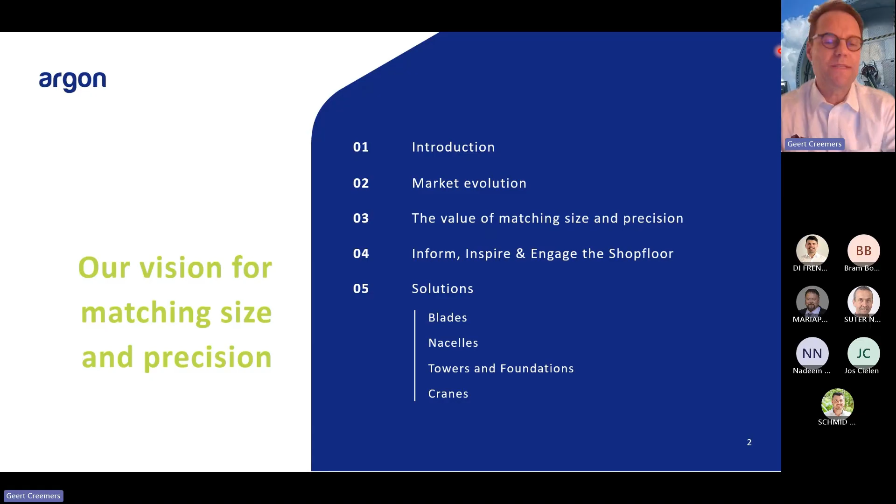Let me start by giving you a very brief overview of Argon in a nutshell. We are a niche metrology services and solutions provider. I founded the company in 2004, almost 20 years ago. I'm very proud to say that last year we created an Argon 2.0 - I created a new management team from people that came from within the company, we did a management buyout, and we are actually a new company.

We are quite small, 21 people, 4.2 million euro last year, which represented a 30% growth. Compared to what we did in the past, we are very, very focused now. Our focus is really on large scale metrology, and particularly also the wind sector is a prime focus of us. And in terms of partnerships, we are focusing on Hexagon as a prime partner.

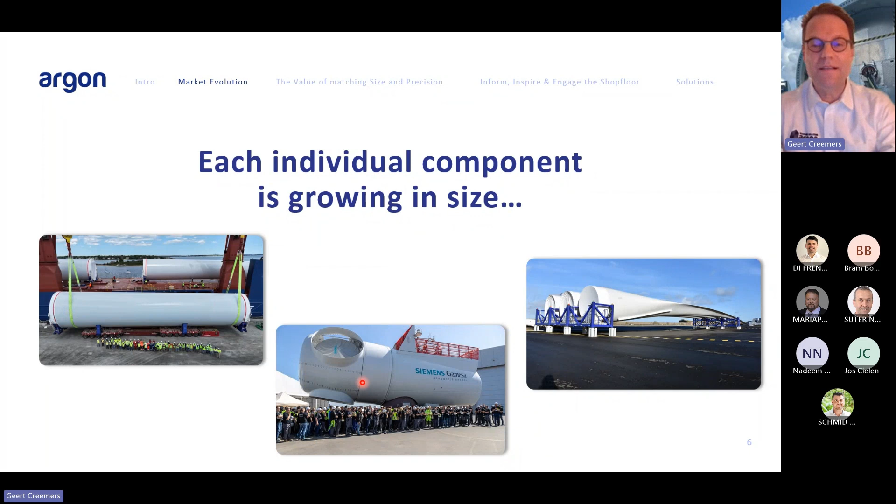Which means every individual component is growing in size, from the towers, the foundations, to the nacelle, to the blades. What does it mean in terms of numbers? You're talking about 110 meters, 120 meters currently, going up to 150 meters in the next decade, but beyond 150 meters. The nacelle, a generator, direct drive generator.

In the past, 5 years ago, you had diameters of 4 meters. Now you are at 8 meters. They go to 10 meters, and it will still go beyond that. The towers and monopiles, there you talk about structures of 100 meters and then 70 meters below the sea level. You're sitting with diameters of 8, 10 meters and going up to 12 meters. So these are gigantic structures.

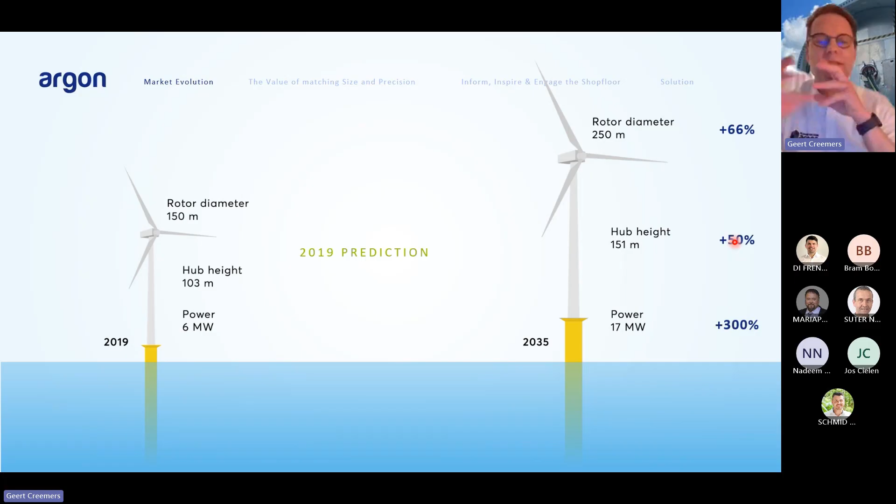And you think, well, how is this evolution going? So I took a graph here from 2019. The prediction was that by 2035 you would see a growth of power by 3 times, and the size in terms of hub height and rotor diameter by 50 to 66% increase. And if you look in reality, you see that after 5 years, almost 60 to 75% of this increase has already been observed.

You are sitting now at 14 megawatt turbines that are shipped out and installed into the sea from Siemens, whereas they predicted 17 megawatt by 2035. The rotor diameter, you are sitting already at 190, 200 meters. And the hub height, you are sitting at 140 meters. So it is actually growing even faster than predicted even a couple of 5 years ago.

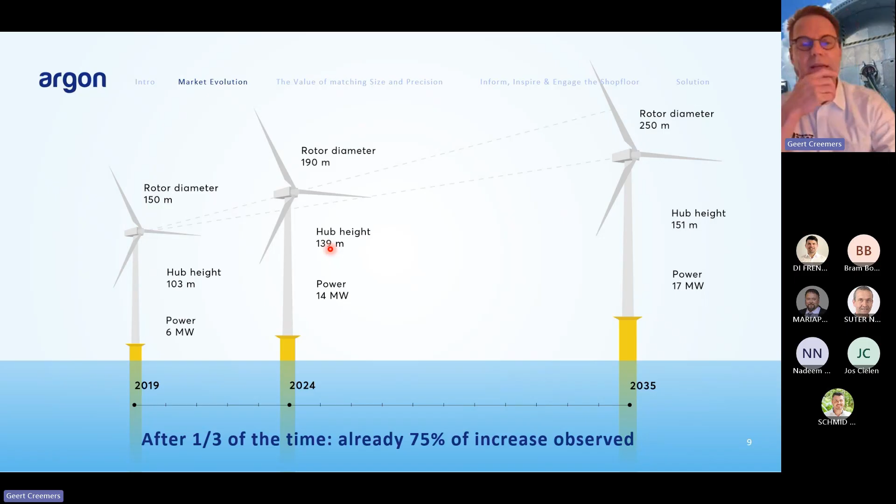So that presents enormous challenges. Despite the fact that you talk about 100 meters, even the millimeters do matter. It's a little bit like looking at a Swiss watch - there you have a 30 millimeter size, and it's the same as talking in terms of microns for a watch. A watch is made with micron precision. At a similar scale, here you have 100 meter structures that are made on millimeter precision.

And why is this important to millimeters? It's about turbine performance, lifespan, maintenance cost, and production efficiency. We'll talk more about that later. So when you don't get these millimeters right, you will have bigger problems, and these small problems can become even bigger problems in the future.

If you look at it, these wind turbines have the size of the Eiffel Tower. And it's really amazing to realize that geometry errors of 1 millimeter in certain key components can have a non-negligible impact. So it's pretty amazing.

So we see that when you start manufacturing with higher precision, bringing these tolerances down to millimeter and below millimeter, you get increased quality and increased efficiency. The quality is about your turbine performance - you increase your annual energy production, you increase your lifespan, less vibrations, less fatigue, and that means also lower maintenance costs.

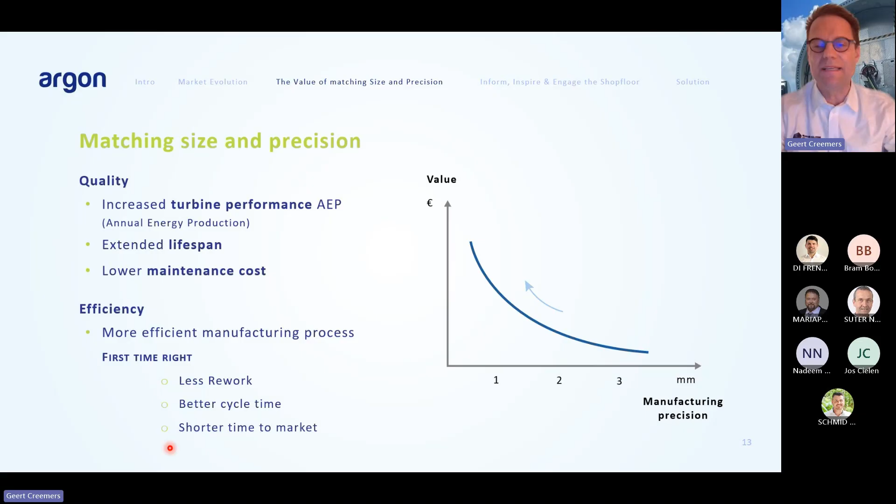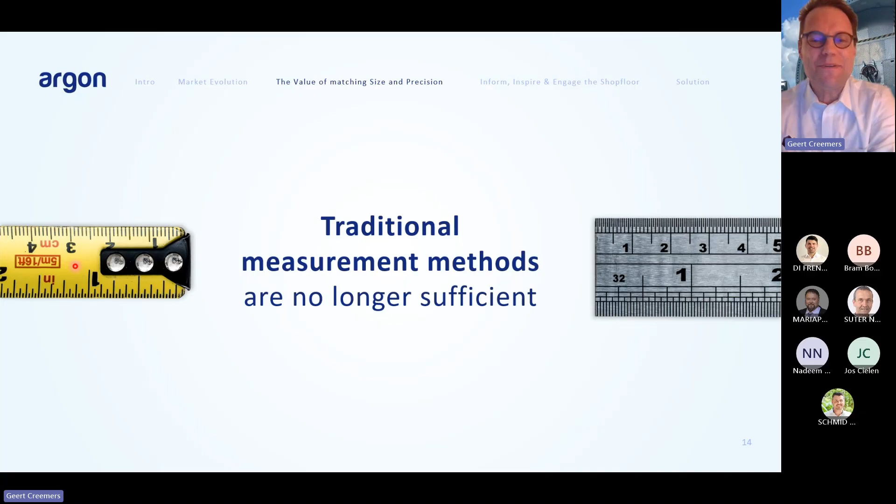It means also that these traditional methods - and what you see here is not a joke - are the methods currently most popular in use for this type of industry. At this moment, I'm in Aalborg in Denmark at the blade factory at Siemens, and I could not take pictures, but yesterday a blade was glued. I had a lot of tape glued on the blade to measure with the roller tape certain dimensions. So it's still going on. But these traditional methods to meet the challenges of the future will no longer be sufficient.

Why? Well, have a look here. This is how flanges of a tower or a monopile transition piece used to be measured a couple of years ago. You see lots of people, I count about 7 people, ladder, very unsafe. Of course, you can imagine it's very slow, a limited amount of data. If the blue guy measures it or the white guy, the data will be different. So it's user dependent, limited accuracy.

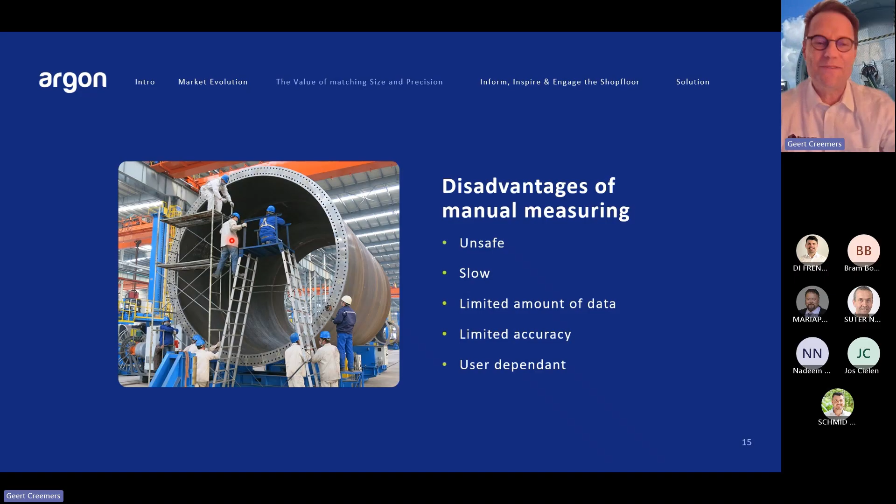So they're not going to make it with this type of method. So you need new technologies, you need new tools. So that is where Hexagon comes in to develop these new tools. And the first such tool was released in 2019, the ATS 600. It's a new non-contact large-scale measurement device. And I call it an automation.

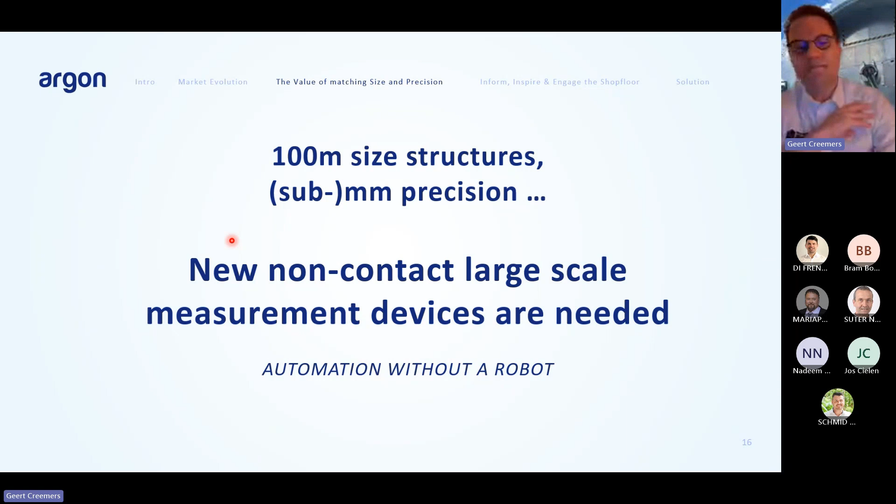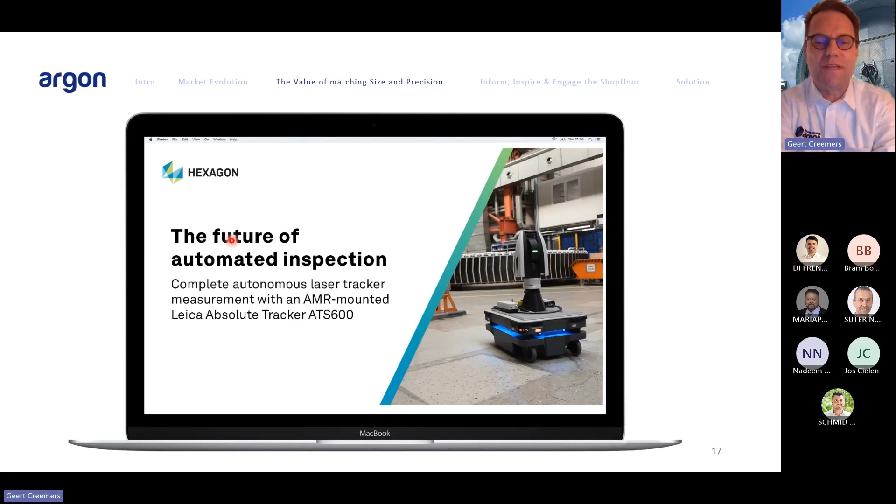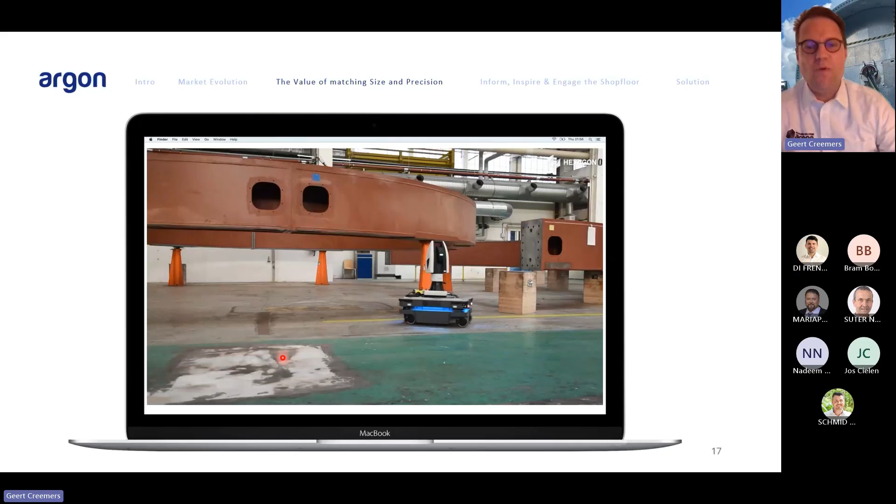We're talking about automation, automated measurements. And this is automation without a robot, because robots cannot be used when you talk about 100-meter structures. So, of course, to give you a flavor of this, for those who are not familiar with the ATS 600, here is an advanced implementation, even on a mobile platform, autonomous and AGV platform.

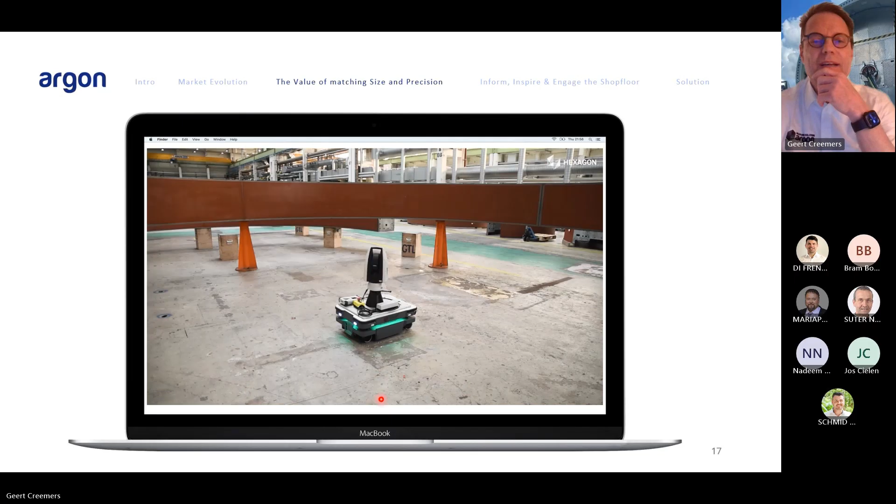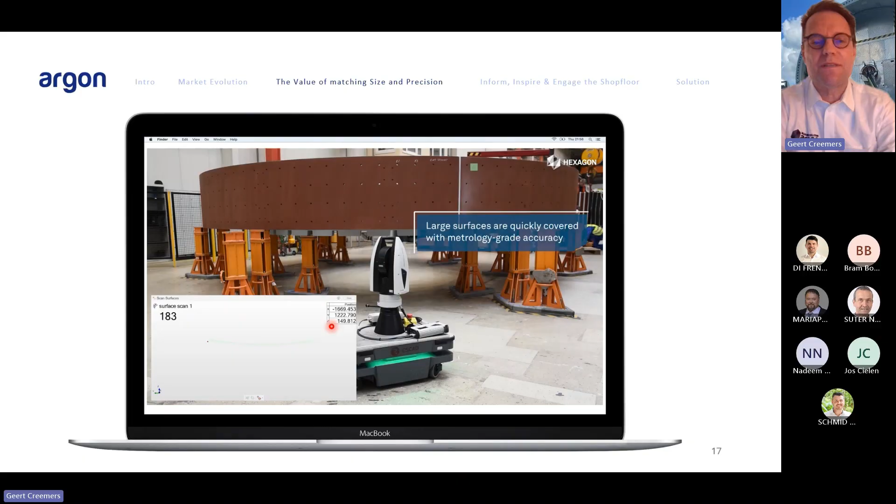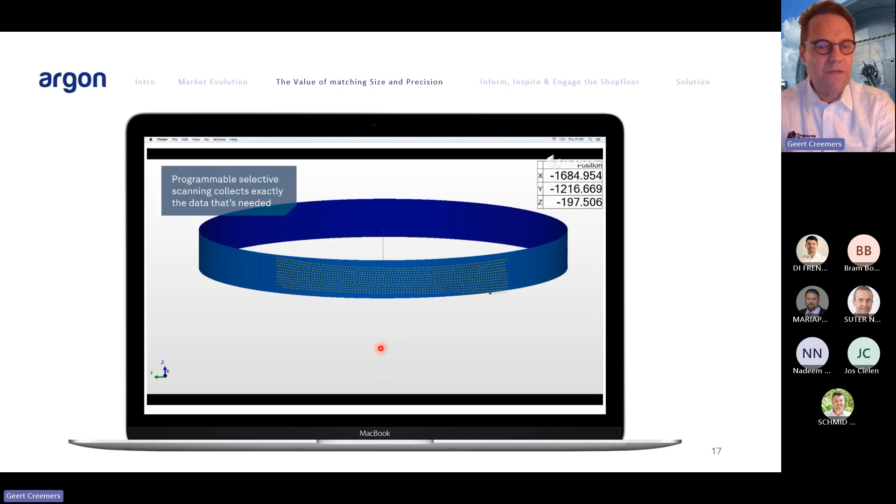And you see it really can measure with a laser dot autonomously without the involvement of a human hand, and it can digitize surfaces in quite a quick way. This example also shows that you can move it around in an automated way, and in that way ensure an automated accurate inspection of your parts on the shop floor. So you get your results. So you're fully digitizing your surface.

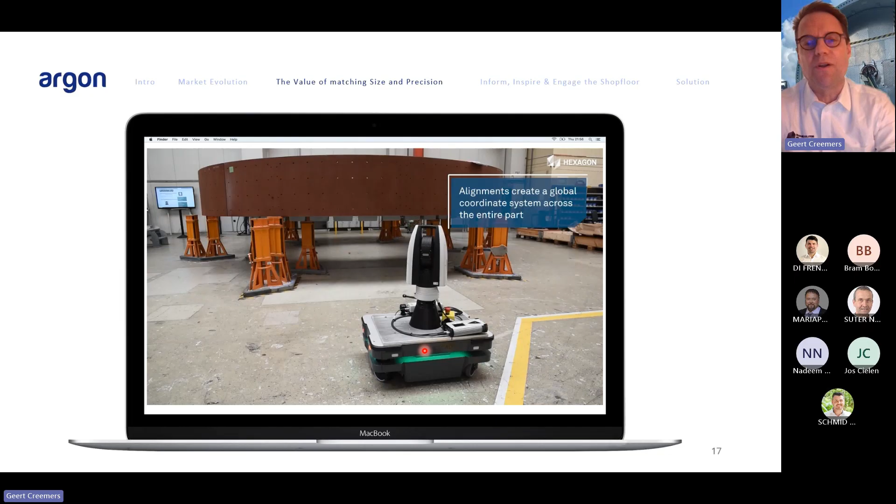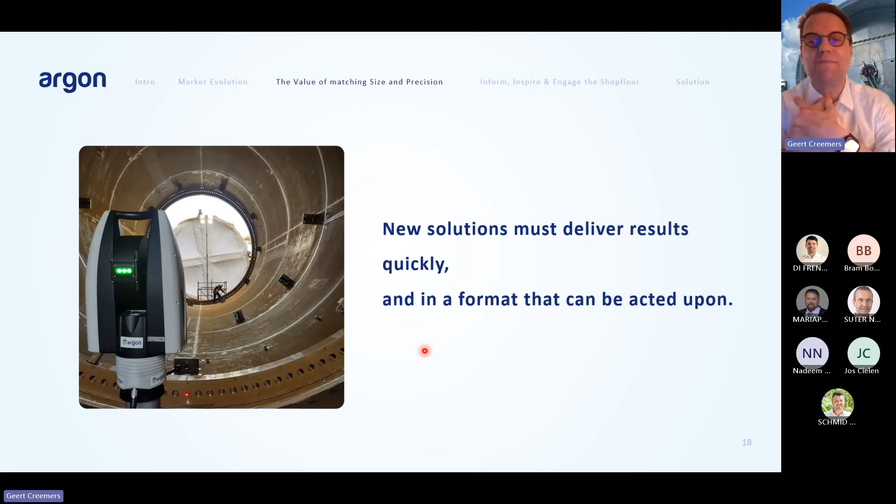So this gives you a flavor of these new technologies that are really autonomous laser tracker technologies. So these technologies, it's good that they can measure autonomously. It's good that they can measure accurately, but also it's important to deliver the results quickly, in time, and also in a format that can be acted upon. So that's also quite important. So that means that this feedback loop or feed forward loop, the shortening of that loop is key. If you can ideally do it within the cycle time of the production, you create the most value.

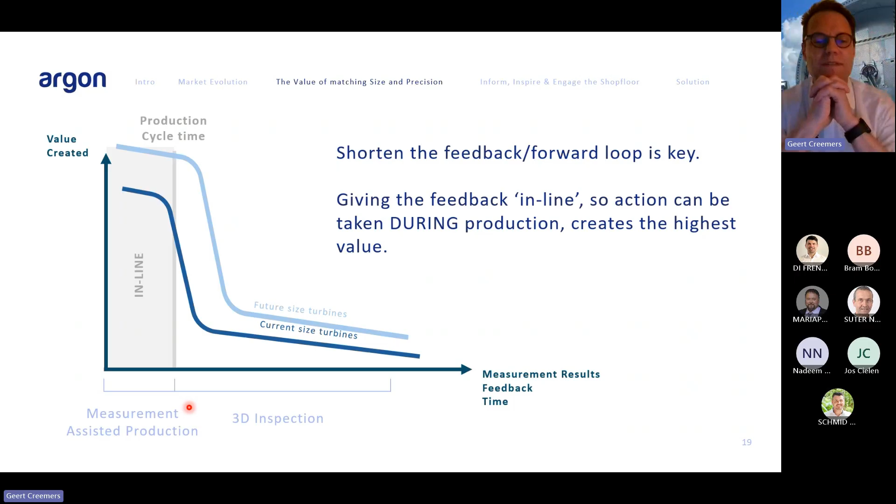We see for customers, when we go to a customer, we immediately look at, okay, is it what we call a 3D inspection solution? Or is it a measurement assisted production solution? Because we know the client has much larger budget, has much more interest when it can really become part and parcel of his production activities, so that the measurement results are really used immediately and are acted upon by a machine or an operator as part of the manufacturing process. So feedback time is critical.

And of course, you have to do this all without robots. So whatever you do, you have to get operators involved. You have to empower operators. It's a people's game. And to give you an idea how Siemens Gamesa, currently our biggest customer, also did communication about getting their operators involved, we show you this video. It is a video that was created as part of our work for them, and this is how they communicated internally.

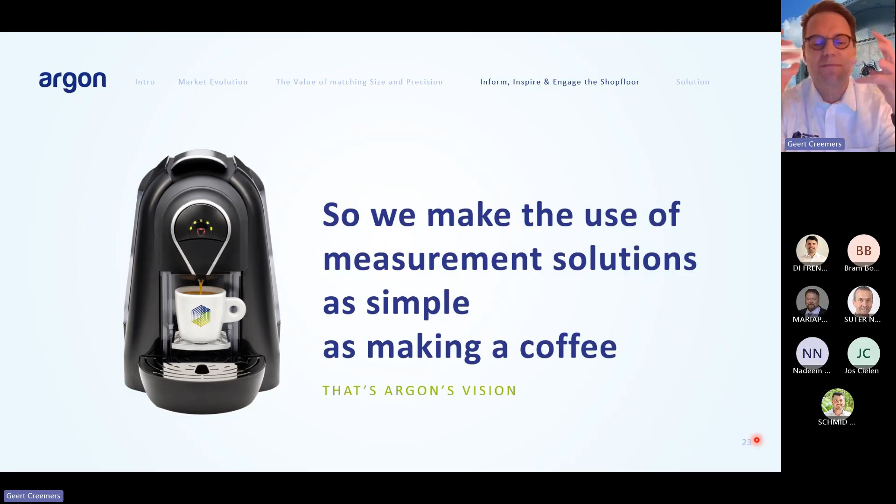And it's really based on the philosophy of bringing measurement technology on the shop floor, and making sure that you get these operators involved, that the actions that they take are correct. And we have used the term making the use of the systems as simple as making a coffee. Really, it is very rewarding when you do these things, that you get the involvement of all the people, of the operators, of the maintenance persons, and you feel also that they start owning the system.

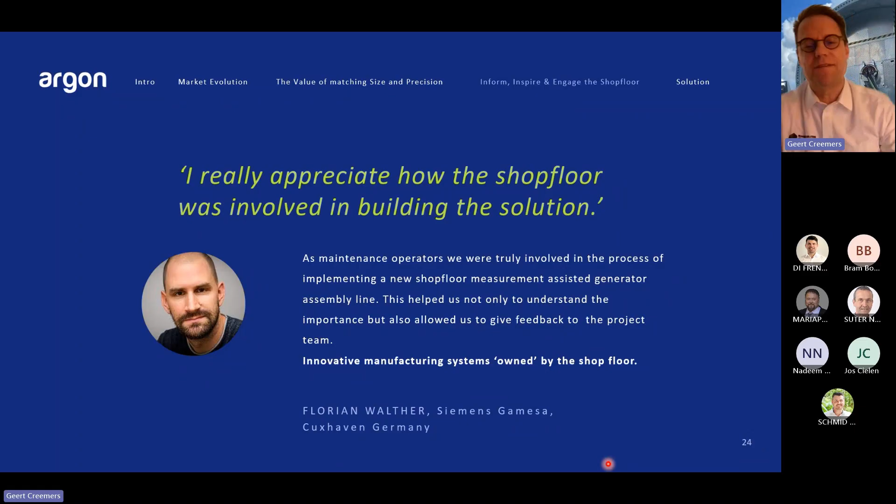And of course, it's all about, if you cannot see it, you cannot solve it, you cannot prevent it, you cannot improve it. A small anecdotal story that I can tell here is that last year we did a project in Denmark, where a supplier of windmill towers was handling the towers with the hook, as they have been doing for the last 20 years. But because the towers are getting bigger and larger, suddenly plastic deformations started to come in because of the size and the sheer weight, 400 tons.

And so they were measuring as they did before, measuring as much as they could, but with the traditional methods. So they didn't pick up these deformations. And it's only by bringing in more advanced technologies, when Argon was called in, we could actually make the invisible visible, and then try to solve it, prevent it for the future, and improve their processes so that they can avoid such things and deliver better quality.

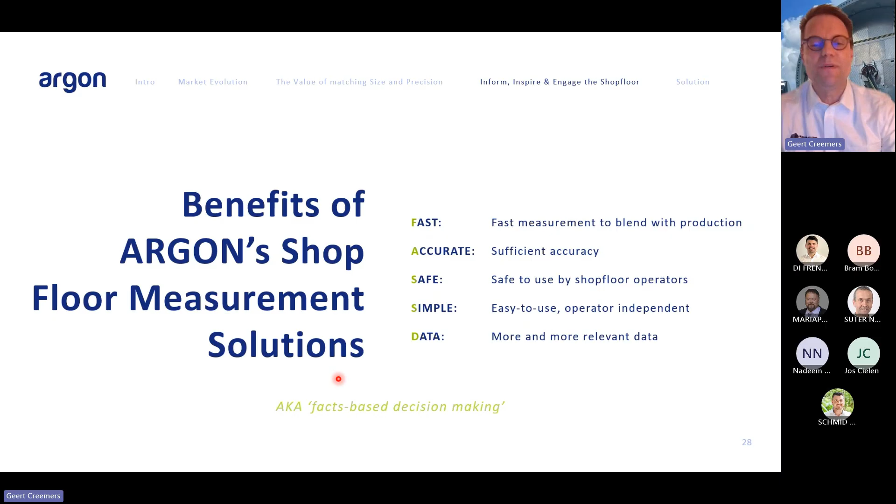So yeah, it's all about what we call shop floor measurement solutions. And the benefits of those solutions are speed. Generally we can go up to 4 or 5 times faster than traditional methods. We are generally more accurate, we are safer, it's much easier, and you get more and more relevant data so that you can come to really fact-based decision making.

So the building blocks really are, generally we have 5 building blocks of our solutions. It's about hardware, services, and software. The first 2 components are hardware, which is the measurement technology standard that we buy mostly from Hexagon. And then we have our own automation hardware and tooling. In this case, you see a trolley, you will see other examples.

When it comes to the software, we use also external software, Metrologic or SA, and we have our own smart interfaces, our own human-machine interface, which is very critical for a good, easy solution, and also the application scripts, which contain all the know-how of measuring and analyzing the data for a given niche application.

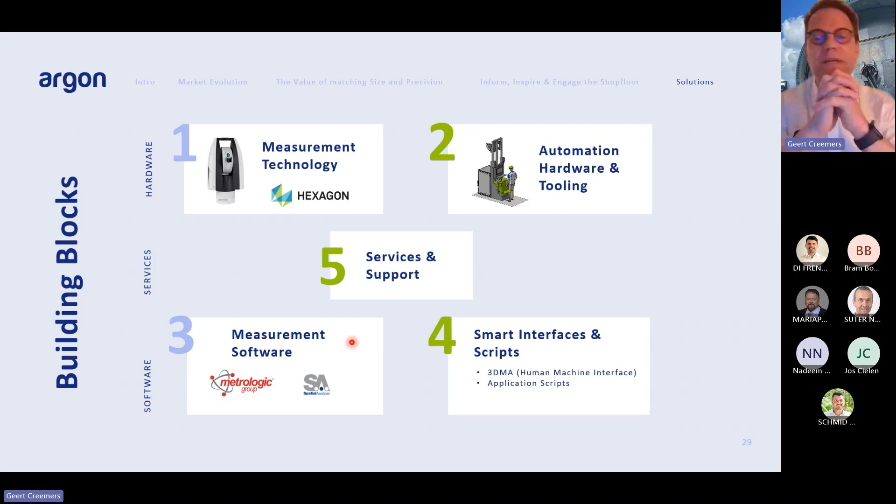And of course, with software and hardware, you're not creating a solution. You have to really offer a lot of services to implement it, to guide, to train, retrain, to optimize, and then also to support along the lifespan of the project. Support with new programming of new variants, support with yearly update training, support with small optimization services, backup services, calibration, and so on.

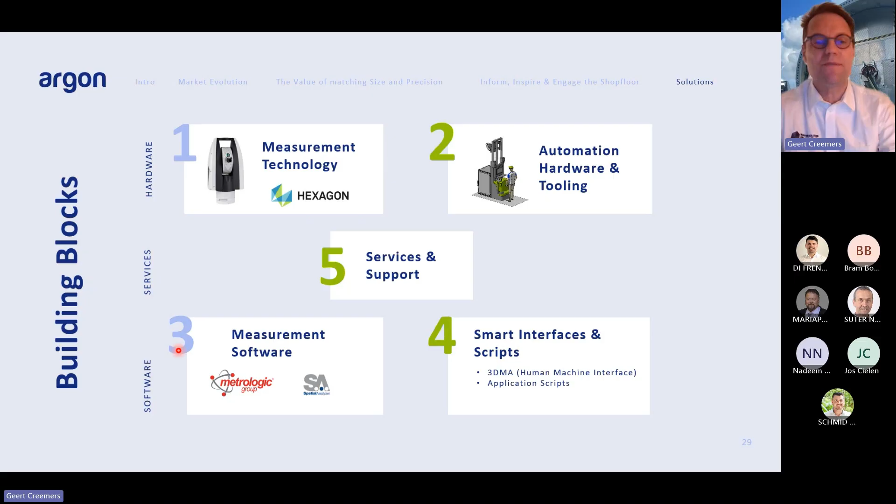And together this then delivers a solution that for the customer is really much more than the sum of its components. And if we look now concretely at what that means, let's go through some solutions that we developed for the sector step by step, starting from the blades over nacelle to towers and cranes.

Let's start with blades. So blades, some of the key challenges there, when it comes to product quality, it's really the wing geometry. When it comes to surface smoothness, the overall aerodynamic shape, that is really critical for turbine performance, critical for minimizing turbulences and vibrations.

The root, also very important to make sure it's fixated well on the hub. Recently, I saw some pictures in the news of a blade that really broke off. That is probably because it hasn't been made as precise as thought, and fatigue pops up quicker, and in that way you get failure. So the flatness is important.

A nice perpendicularity of the root on the blade axis is also important for avoiding imbalances. And there also precision: the more precise you produce, the less imbalances, the less vibration, and the higher performance you generate. Of course, also when you're producing these large components, when you're setting up the molds, when you're drilling the holes, assistance is also needed.

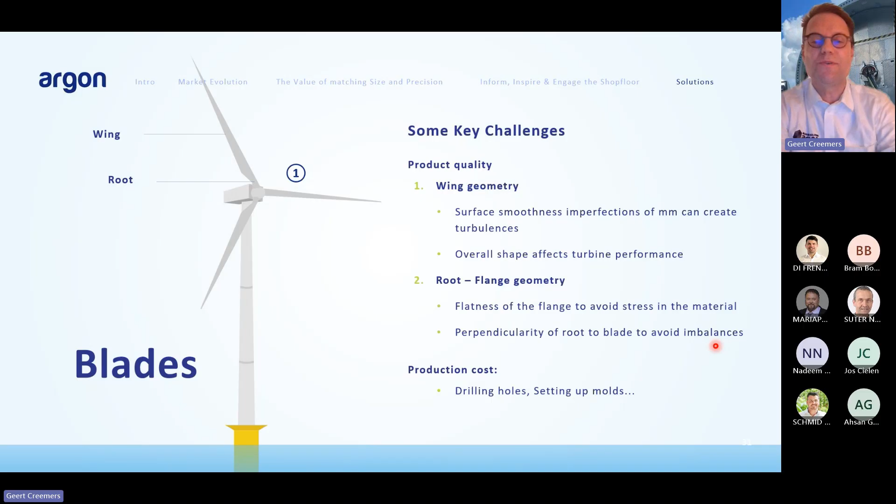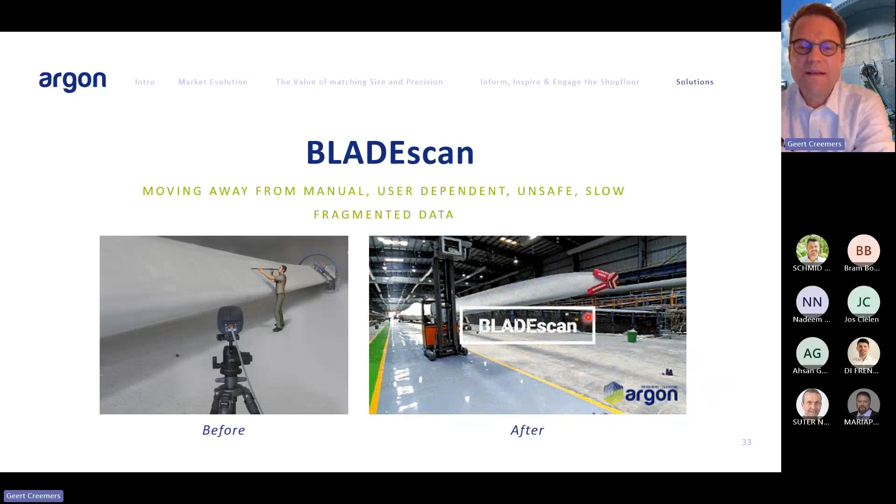But you see, it's a trolley that's moving around the blade, and the root is at this moment still inspected tactile, but we're also working on non-contact next versions. So it is really about a trolley that is moving around a 120 meter blade, going up to 8 meters height to measure the trailing edge, and it's all guided by a human machine interface on a tablet PC.

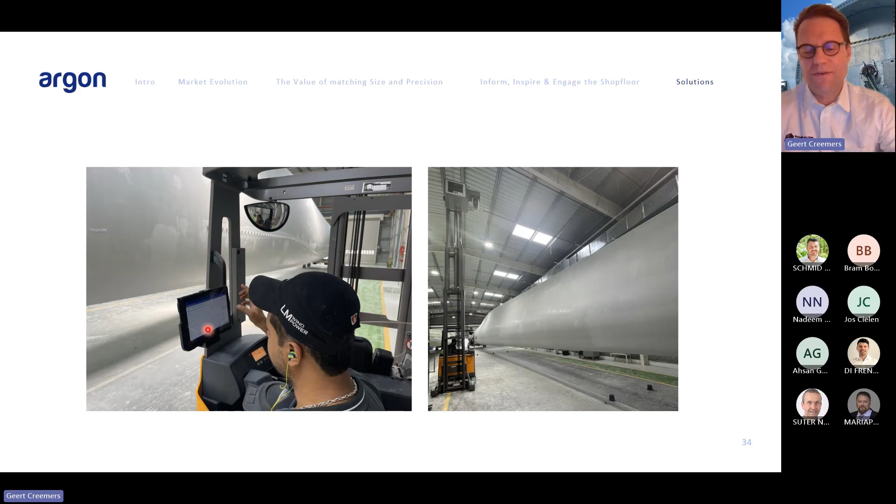A next critical component of a turbine is the nacelle, where the generator forms the core of that part. And when you talk about the generator, it's really the air gap that is a very important determinant of the annual energy production of such a turbine. A 1 millimeter deviation from the optimal air gap leads really to a reduction of this annual performance. So it's really a challenge to produce these in a repeatable way with the optimal air gap.

And that is something where we have helped Siemens significantly. And in doing so, we also created the first time right generator assembly process. So they gained in terms of production efficiency and in terms of product quality.

And we have done this by measuring the rotor house and then doing the assembly of the stator based on the data from the rotor house to do a measurement assisted assembly. And going from the past manual 1 hour measurement time solution to a live tracking solution for this segment assembly. The rotor housing is measured in about 15 minutes.

Also, again, you have more accuracy, you have less operator action, so it's safer, it's simple, and you get live results. The rotor housing geometry is used as input for the stator assembly. It is done with Hexagon technology and also partly with other technologies such as a laser radar because of the precision that this device can deliver.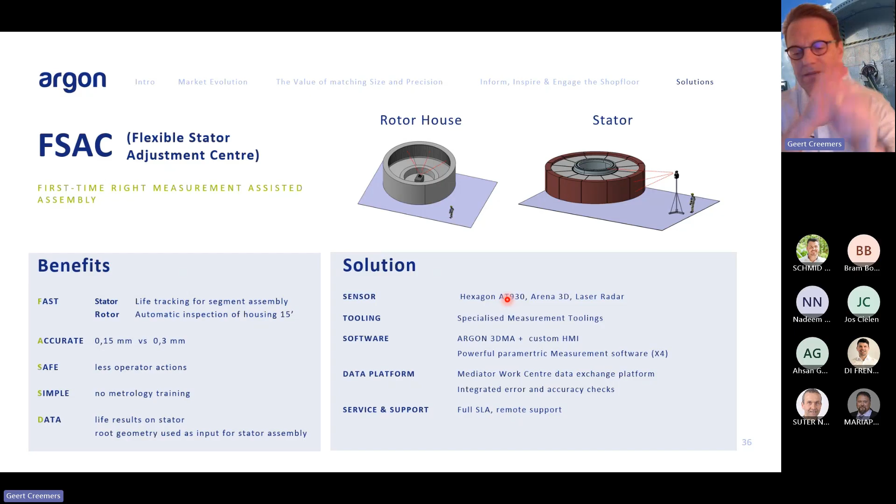So in the past it was done with photogrammetry. Now it is done with optical techniques that work much faster and give you live results and which are shown to the operator in this way. So you go from a slow, unintegrated manual user-dependent measurement system to a more integrated live system.

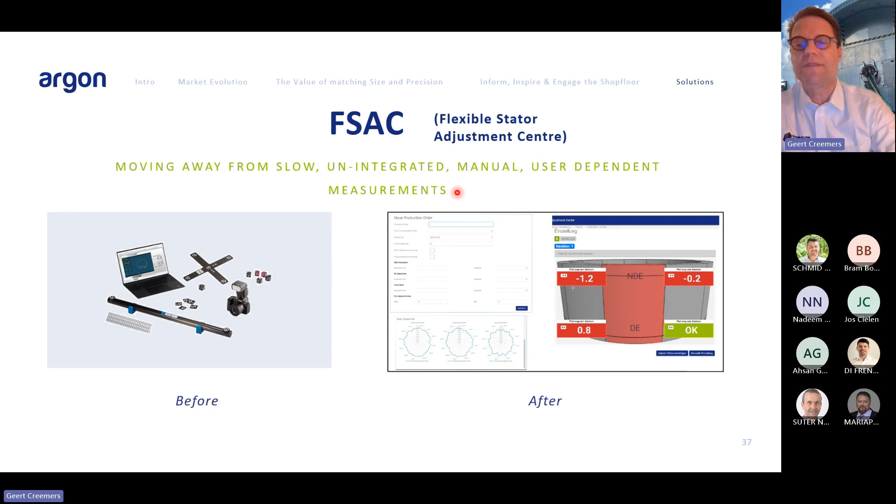To do such a project, such a huge project, over 7.5 million euro of invoicing for us over the past years. It's very complex. So we started from a white page at the beginning of 2020. Now several of these solutions are in operation in Cuxhaven. Several sub solutions are in operation. We are copy pasting a solution in Denmark this year, and we started all from a white page.

And of course, you cannot start a project in a traditional way of kickoff meeting, design review, FAT and SAT. We went through a process of carefully designed pre-studies where you start with a design, a first idea, worked out together with the customer. You do a demonstrator or demonstration. You learn from it, you discover things, and then you adjust and you do a new test, and you do some loops

to come to an understanding that all parties, supplier and client, see, okay, these are the risks. We feel comfortable with it. We have them under control, and we are able to jointly define the specifications of the project and then implement the project. And this really has been very successful.

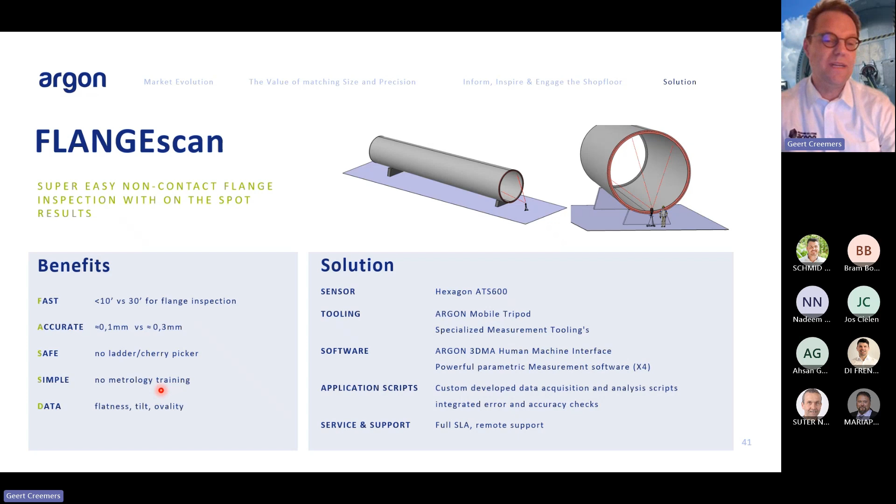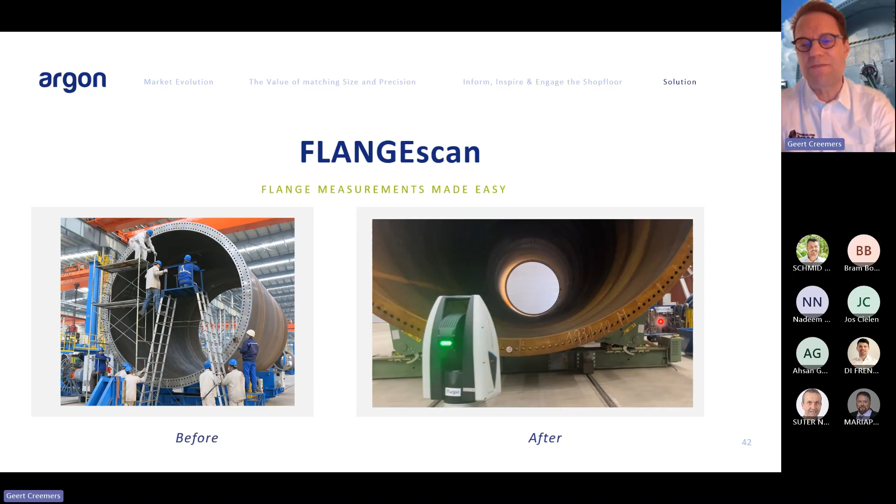We can measure a flange in 10 minutes, more accurate, no ladder or cherry picker, no training needed in metrology, and we deliver all the data that the customer needs. So here, this summarizes the difference. Here you have people, you need to put the person high up because he needs to put a device there. And in this case, you put the device in front of the flange and you press start. So it's a change for this sector. It's quite revolutionary. It has a big impact.

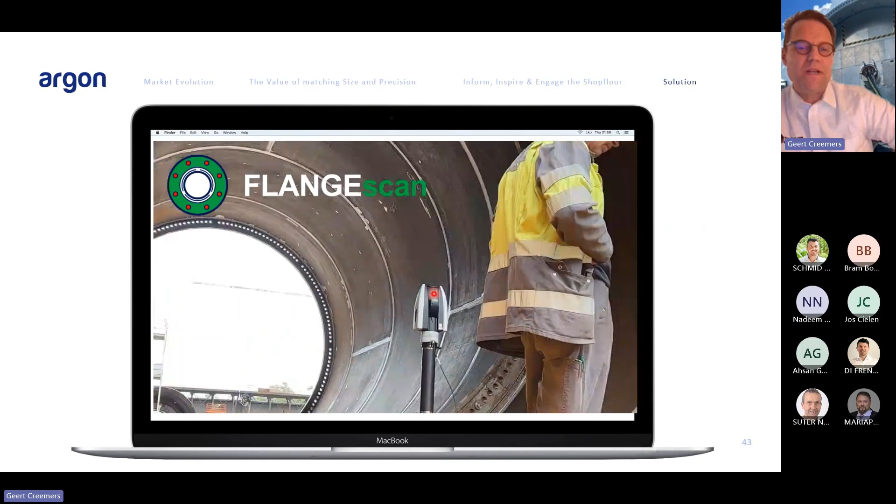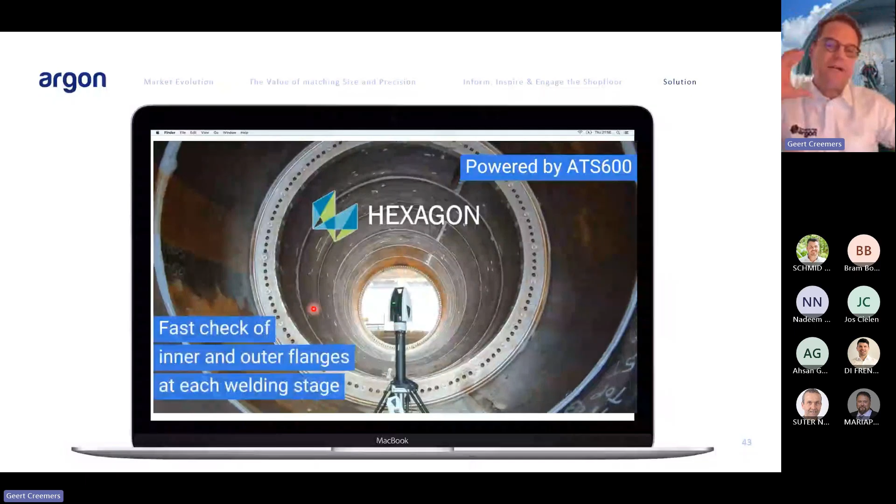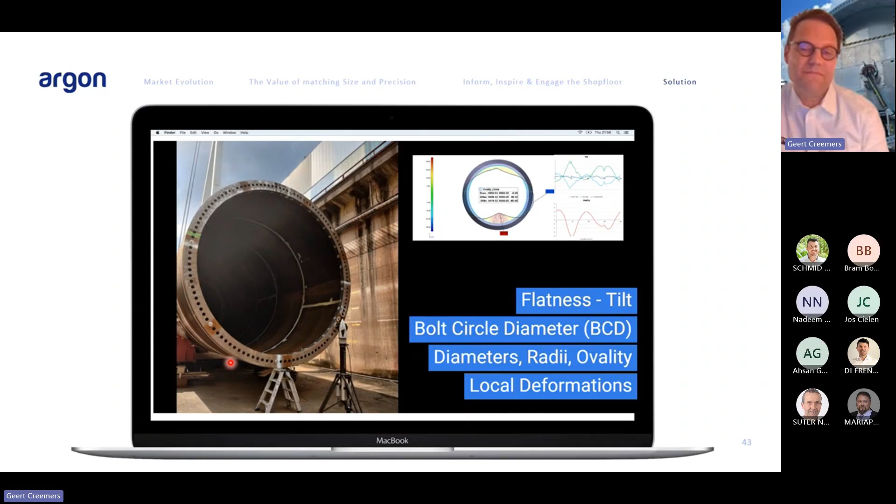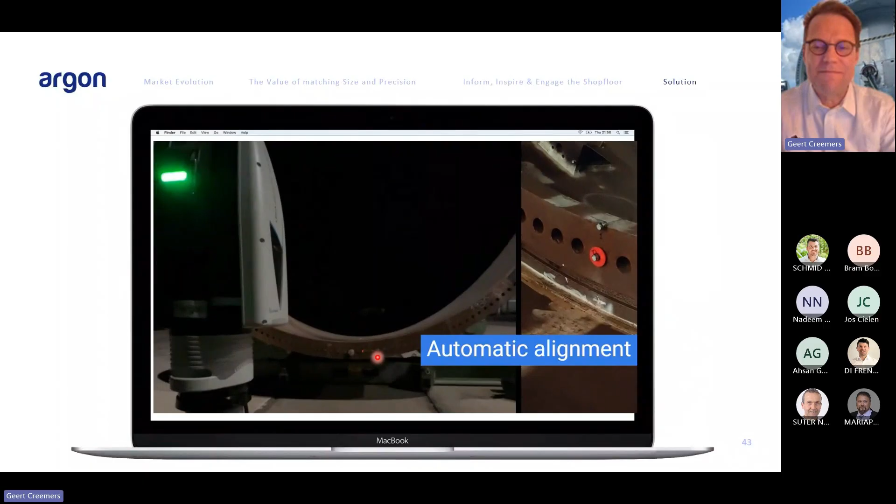To give you an idea of how this looks in reality. So the first implementation that we did in the Benelux area, we did it with a client there in close collaboration. And you get a feel for what it means in reality. So it's a device, an ATS 600, being used for the inspection of these flanges when the pipe is lying horizontally, but sometimes also when they are vertically. So we measure in 10 to 20 minutes, depending on the extent. You get a human machine interface, a tablet PC, you have some specific toolings. And here you see the ATS doing its work, doing the scanning of holes or flatness.

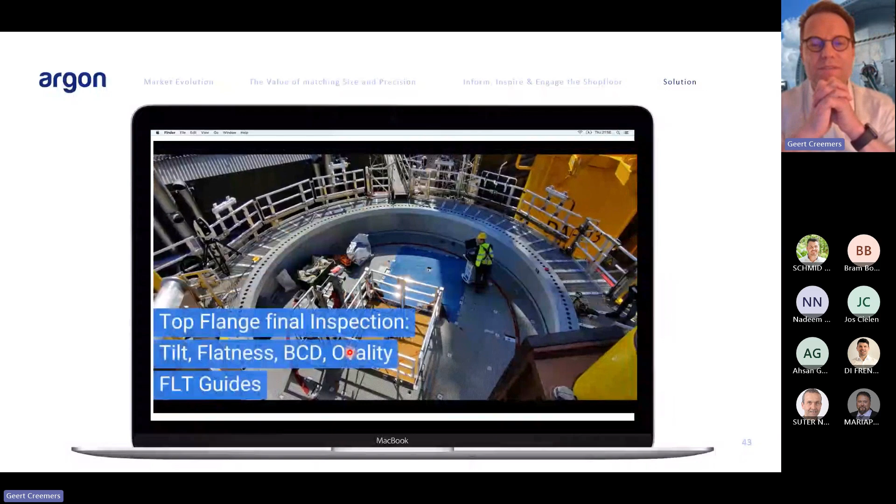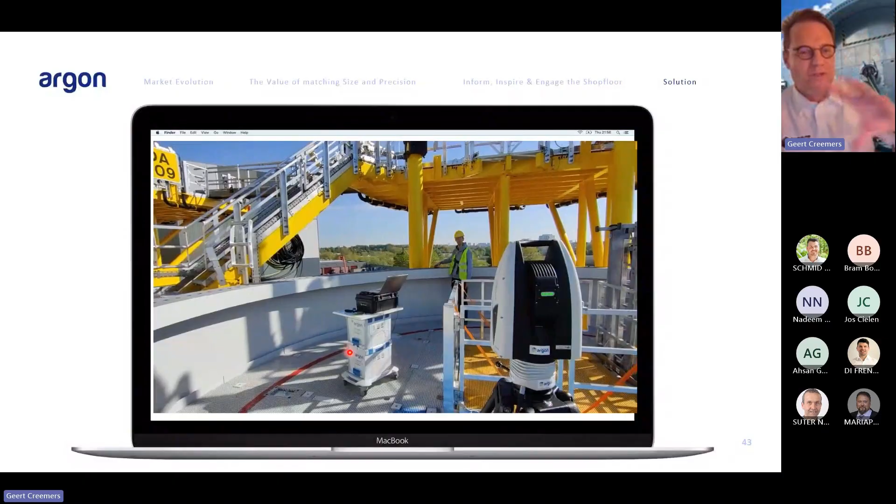Of course, we also made a mobile kit to measure in up-ended position, 30 meters above the ground. And this is one solution that the customer can deploy on the ground to measure horizontal transition pieces or upended at 30 meters in the sky. So it's really setting new standards for both efficiency and also amount of data in this sector. So this is our flange scan solution.

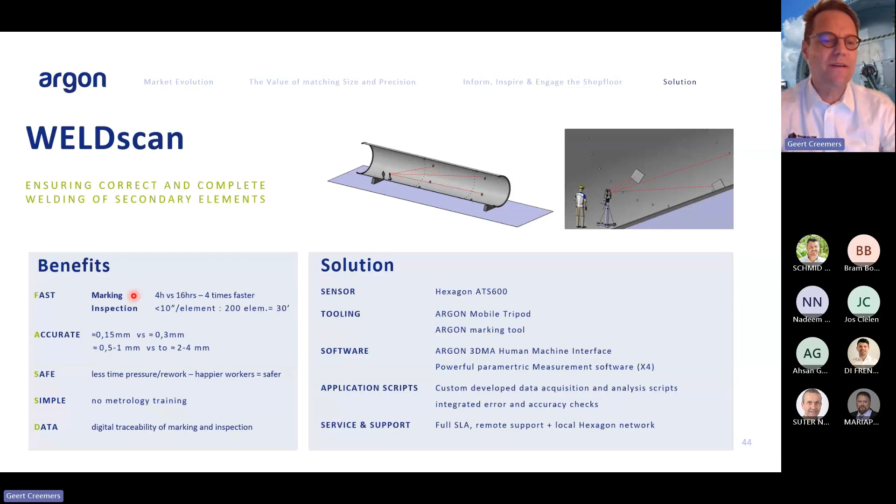Next to flange scan, we also have weld scan. So the same system can be used not just for measuring flanges, but also for helping the company to mark the locations where you weld the secondary steel structures. So you mark them and then you inspect them afterwards. This is what they did before with the roller tape and a distometer, with the distance meter, a laser beam, but really manual. Now they get assisted by live guidance, thanks to the ATS.

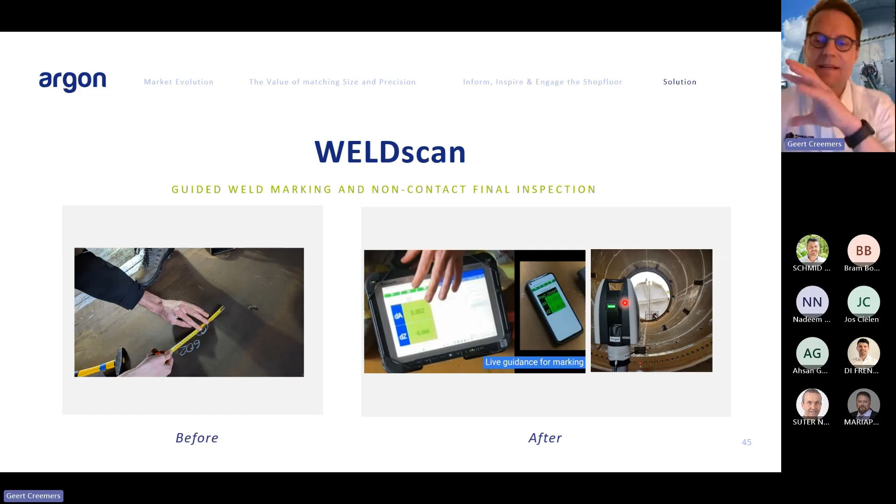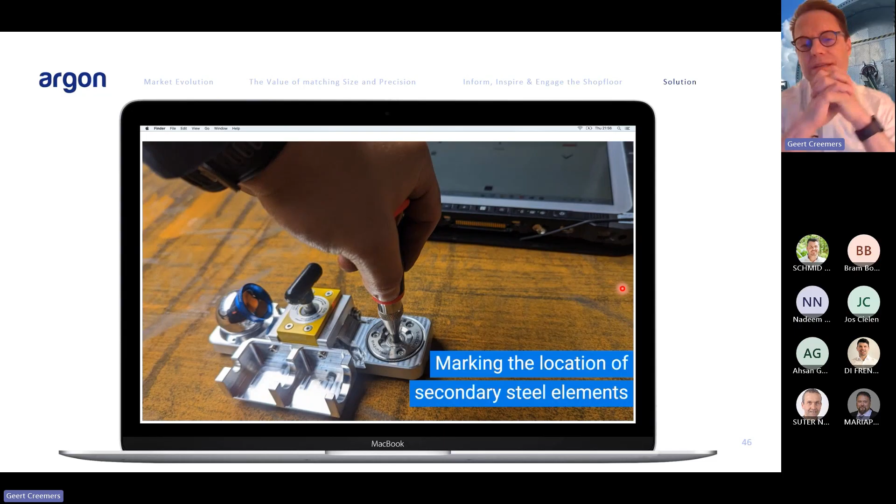And this is a setup when after everything is welded, the ATS is being brought back into the tower, and you press start, and every component is scanned and inspected in that way. I'll show that to you in the video here. So with the same customer, this is also an example of how one investment is being used for various applications within the company, in this way making sure that enough return on investment is created.

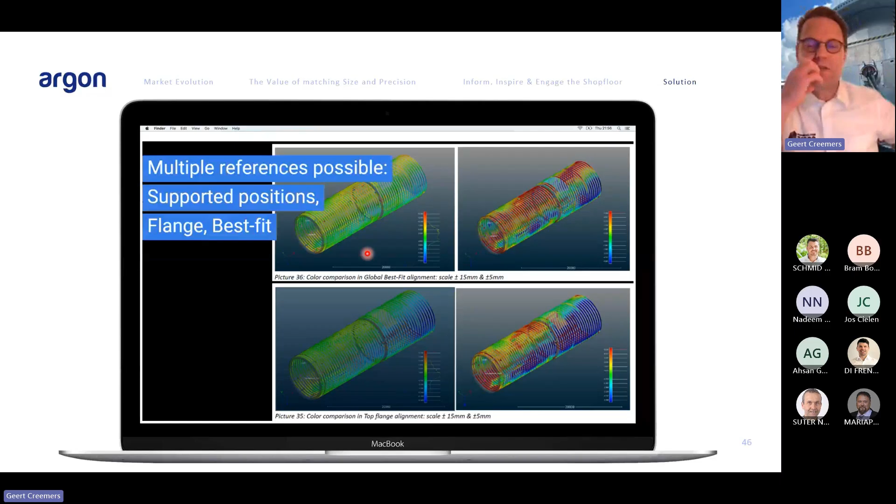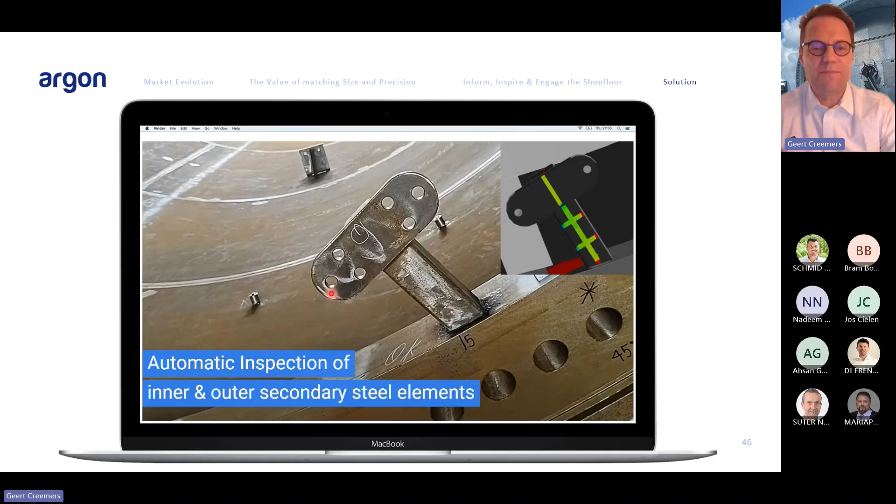So, of course, you can measure the geometry of the overall pipe. You use that for alignment purposes as well. And you see here it's live tracking. This is an operator applying the system. It's a toolkit that we have created. And he is making the markings in the steel for the welders afterwards to weld the components. So you see it here. These are the markers. So up to 4 times faster. But we create 100% reliability. Why? Because afterwards we measure it also.

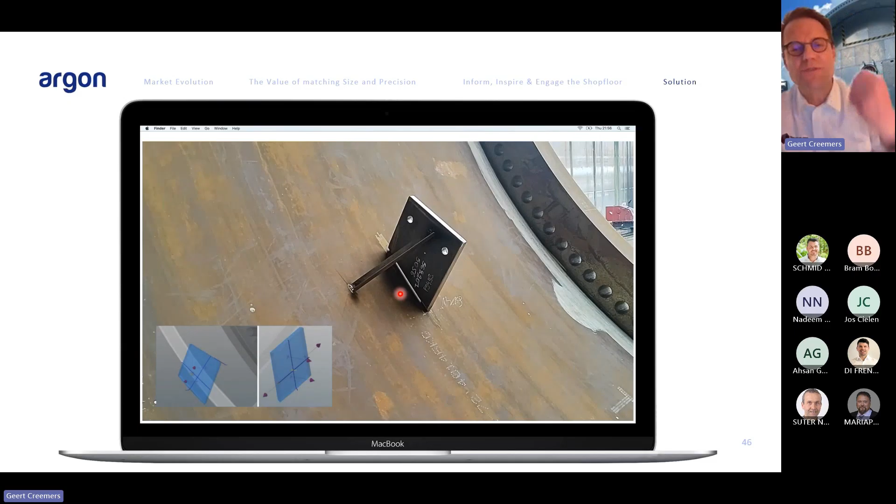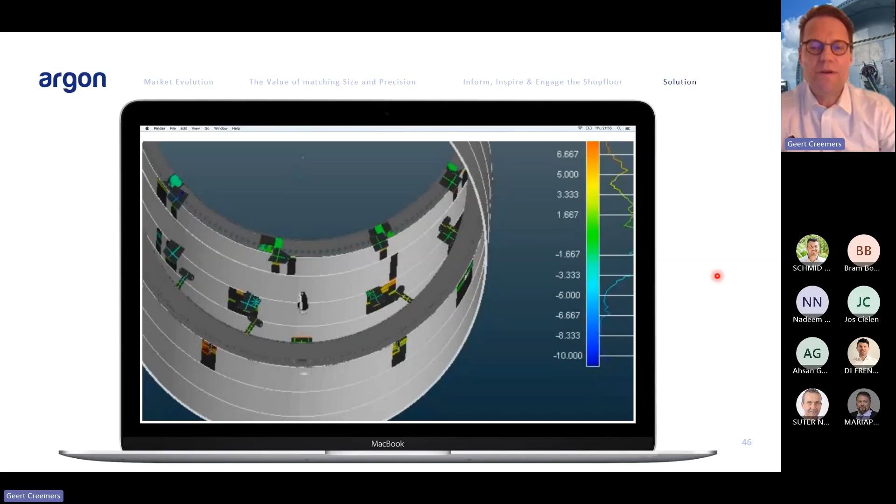We measure all the studs, the components, and you have a digital trace, a full traceability of the correctness of the tower. So that is the advantage of this solution. So you have a full digital traceability, and it's also about new standards in reliability and efficiency in the sector. And we are rolling these systems out now with other companies in Europe.

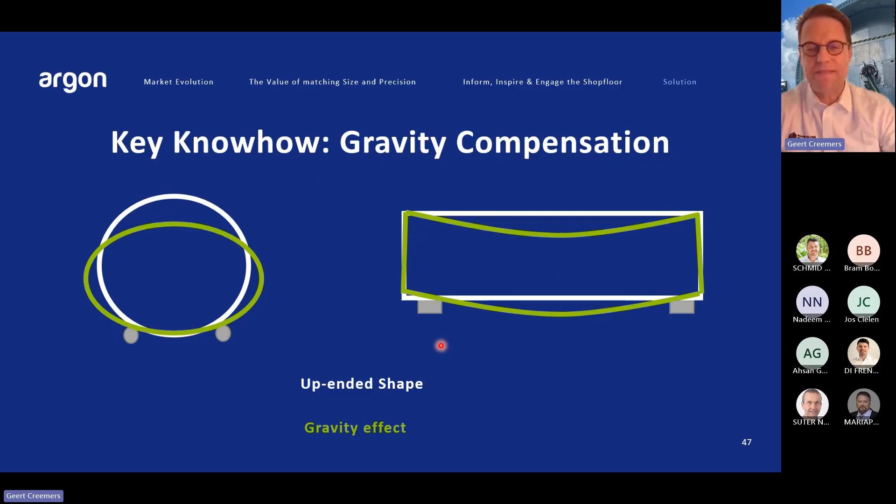And of course, it's not just about a sensor and some software. There's a lot of know-how that comes into play, because if you want to deal with millimeter or sub-millimeter accuracy and tolerances, you have to take into account that there's gravity. And when you measure a part that normally stands up-ended, it takes maybe a fairly circular shape. But when it's under gravity, this deformation can be up to or more than 100 millimeters. Also in the middle, if this is 30 meters, this can be the same order of magnitude. So you have a huge deformation, and you need to compensate for that. And you need to program and develop routines and test it to compensate for these gravity effects. So there's a lot of know-how that comes into play. It looks simple, but it isn't.

Another application that we developed, I call it the mini application, has to do with the platforms of these transition pieces. These yellow pieces are called transition pieces, and basically it's not rocket science, but they have to weld these studs on it to place walking grids over it. So there's a couple of millimeters of tolerance, but still the challenge is to make sure that they are welded on the correct place, that they are welded at all.

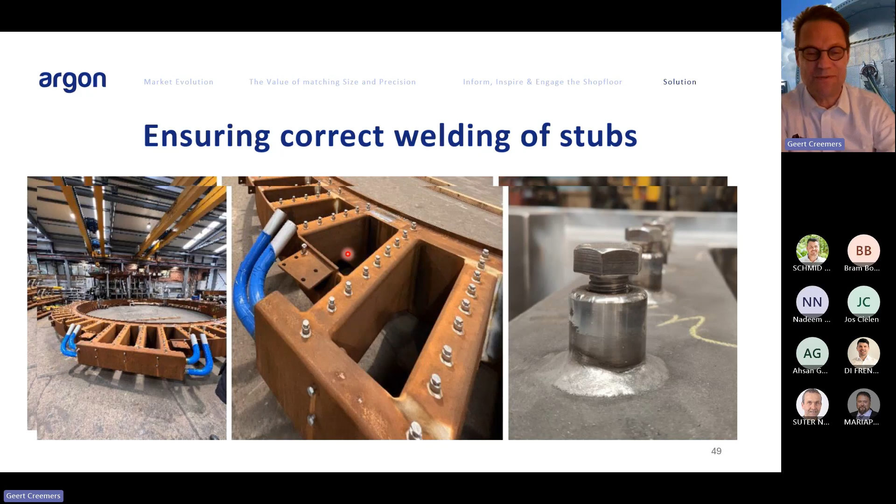And our customer said, okay, here sometimes we make a small mistake, but it has really big problems. So small issues, big problems, and that is why they were ready to invest in a solution that gives them peace of mind when they ship something, when they paint something and send it out for installation. It's not going to cause problems.

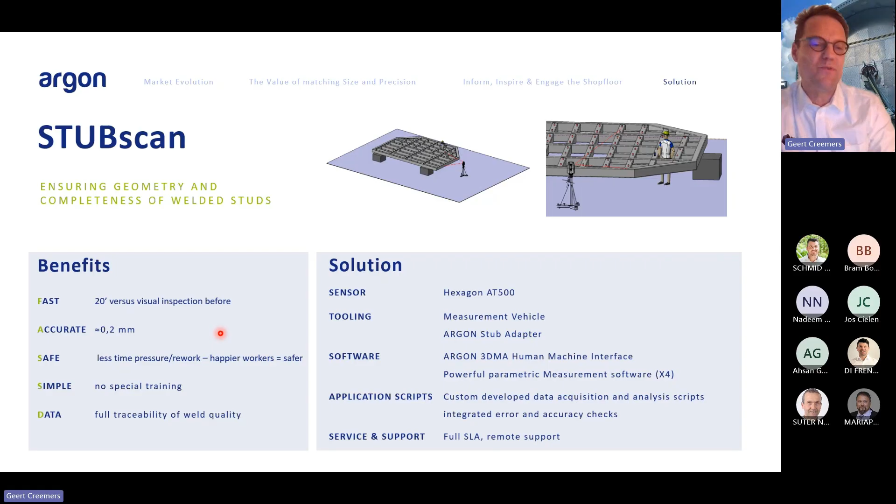So this is, we call it STUBscan. It's a solution, again, based on an AT500, so not an ATS. So there's some more manual work involved. But it gives them a methodology of quickly checking the positions of these studs and doing a correction when necessary. Before they just did a visual inspection, and now they do the inspection here. This is an AT500 with an adapter sleeve made for the inspection of the studs. Of course, this has to be put manually over each of the studs.

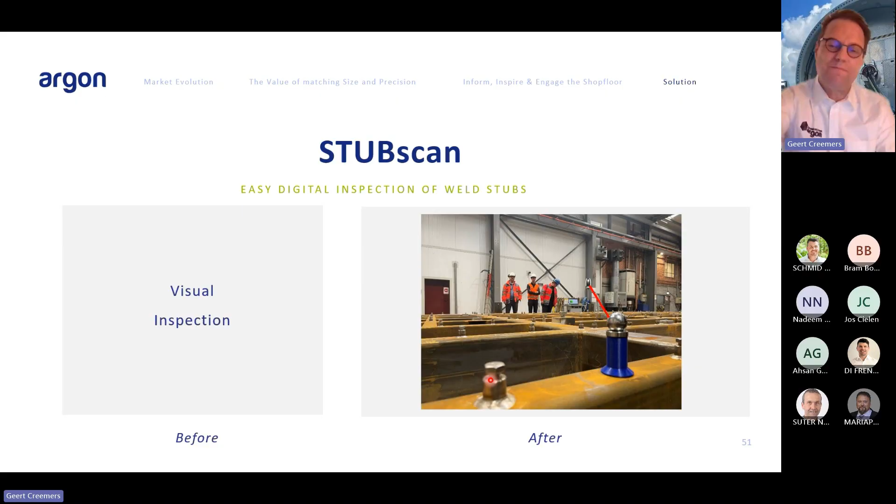So a last application to close my presentation and make some room for questions is CraneScan. Apart from the turbines, you need also cranes on the boats or on land with telescopic cranes to install them. And these also get bigger and bigger, and they are faced with challenges. And the challenges are really creating the straightness of these tubes, making very straight tubes.

They are welded tubes. And also they have to weld secondary components, like for the towers, you have lots of secondary components, maybe not on millimeter accuracy, but they have to be there. If they're not there, they cause problems later on in the assembly process. So they need to be located more or less right, and they need to be complete. Again, the challenge also is how do you mark this? And when it comes to telescopic cranes, which extend up to 100 meters in height, how do you shim them correctly so that instead of being a banana, they are a nice straight line?

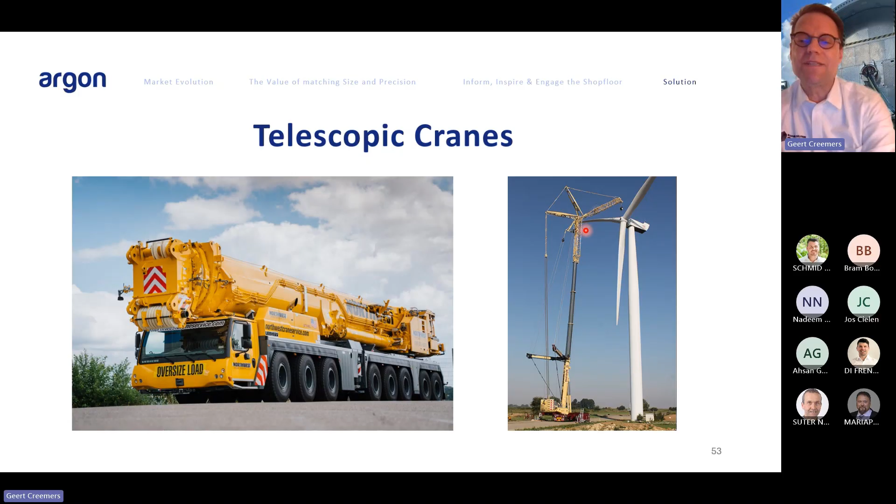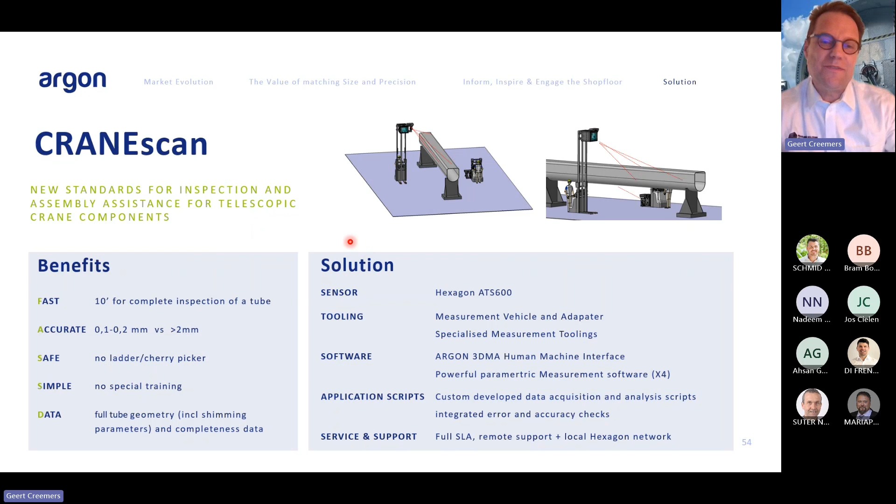And that is where we also have delivered solutions, particularly in the first instance for telescopic cranes. These are the monsters, big beasts that you see here, going up to 100 meters high, with all sorts of extensions. And we created a solution based on an ATS 600 to measure these tubes in a very quick way, and calculate also the shimming parameters from these data to create a first time right assembly process later on. And this is also a solution with a big impact for customers.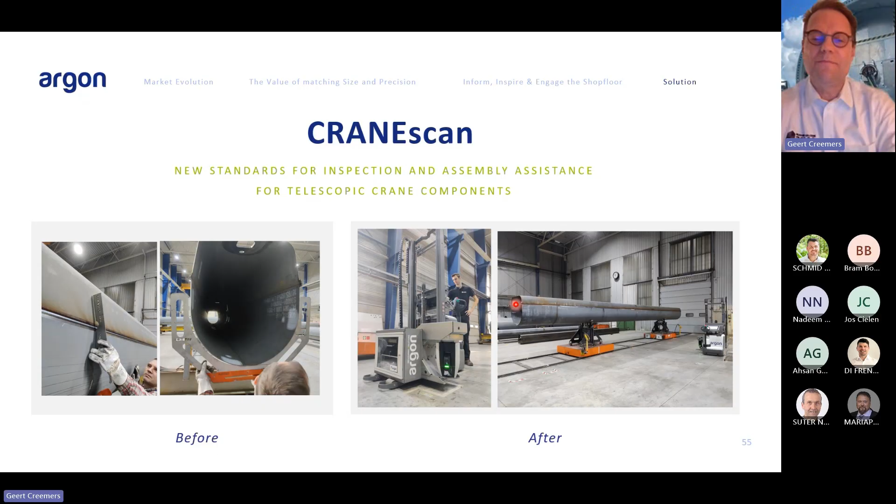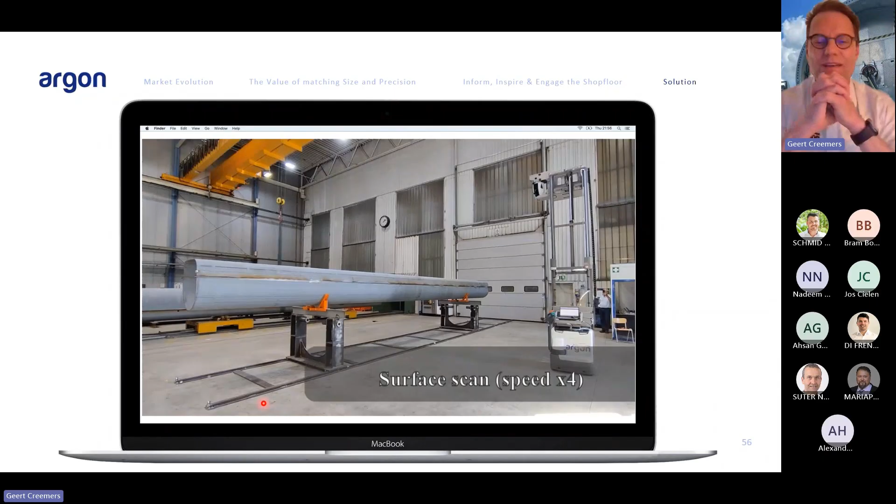To give you an idea of how this looks, a small video with the ATS. You see here the ATS is scanning very quickly. This is four times speed, of course. You work with different positions with a trolley. You move it around. You put it on some marked areas on the floor. This was in a prototype or testing phase, so it's not a final solution, but it shows you the gist: three positions and a trolley that is being moved around to quickly measure the pipe, and all the operator has to do is move the trolley around and press with his finger on a touch screen on the trolley.

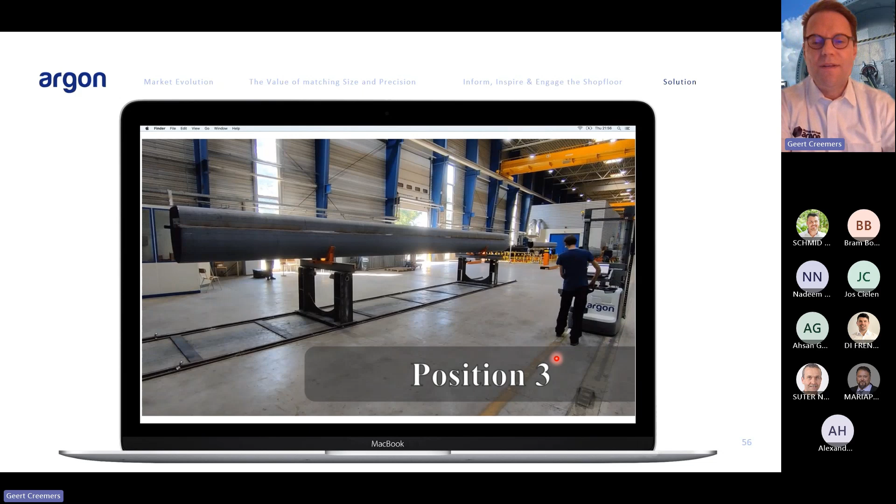So that brings me to the conclusion.

So with this presentation of metrology in wind, we see that in wind, every millimeter counts, even as the structures become much larger, the turbines become ever larger. And you have to make this invisible millimeter visible. That is what we are aiming for with these new technologies from Hexagon mainly.

We do this by empowering the operators, shop floor operators, with these advanced 3D inspection tools to make sure that they are as easy to use as a coffee machine. This can be used for final inspection so that you have peace of mind when you ship them out towards the sea, or you can do that in production as a measurement assisted production solution.

All the time delivering faster, more accurate, safer, simpler, and more relevant data. And that is what our business is focused on at this moment. We see lots of opportunities, we're only getting started. So it was a pleasure for me to share some of the results of this journey, and I'm very happy to take your questions. Thank you.